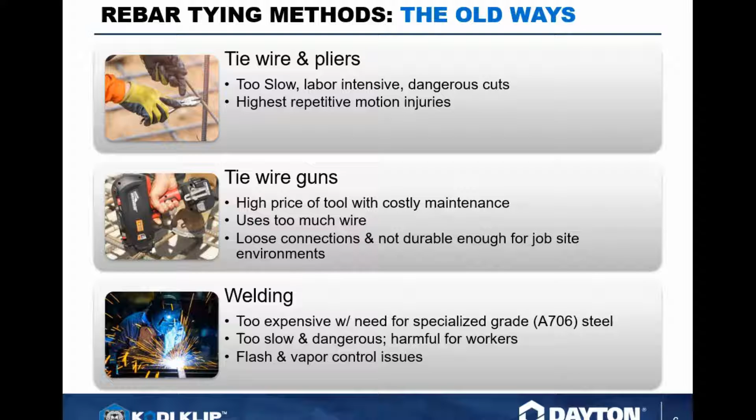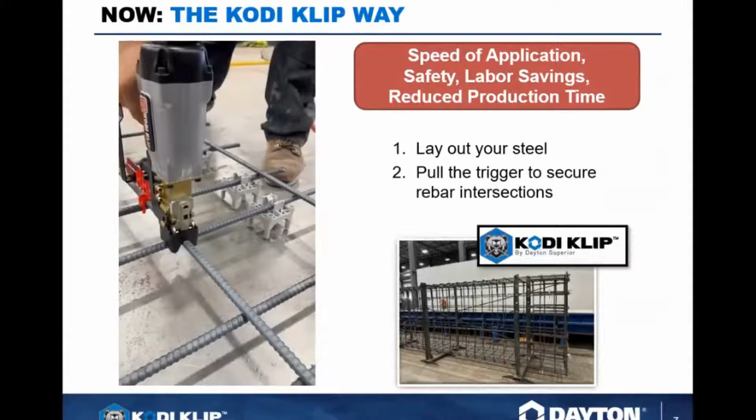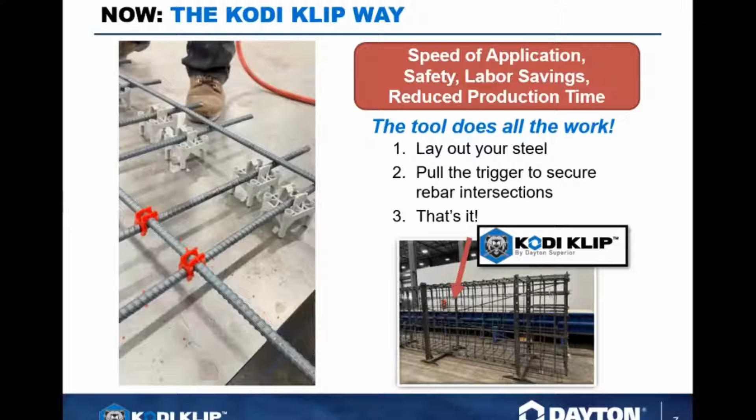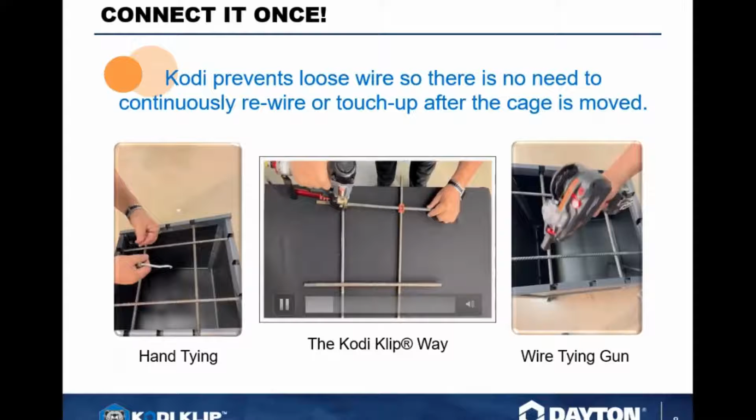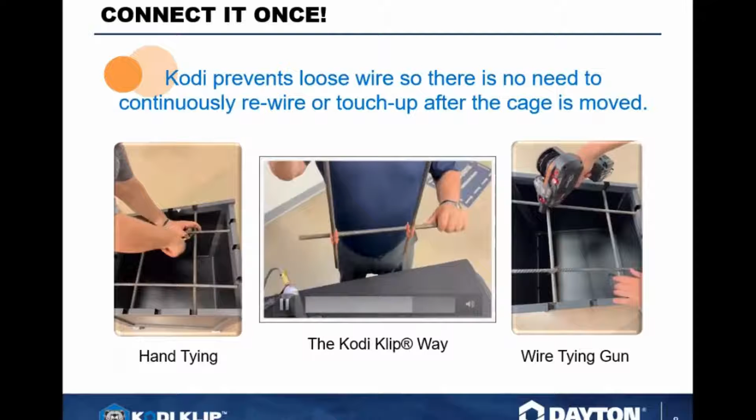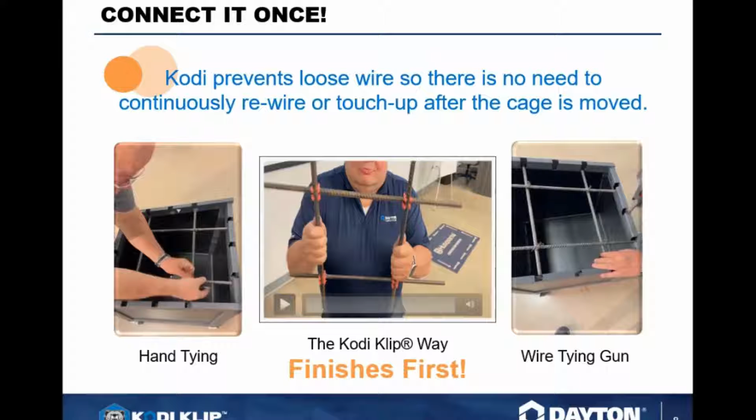Typically when you're looking at it here in the 3 videos, and granted I know I'm not the fastest guy with the whirly bird on the side one, but typically with the rebar cage, when you grab a hold of it, I like the rigidity of the cage itself. And it finished the fastest option, and it gave you the most rigid cage within it.

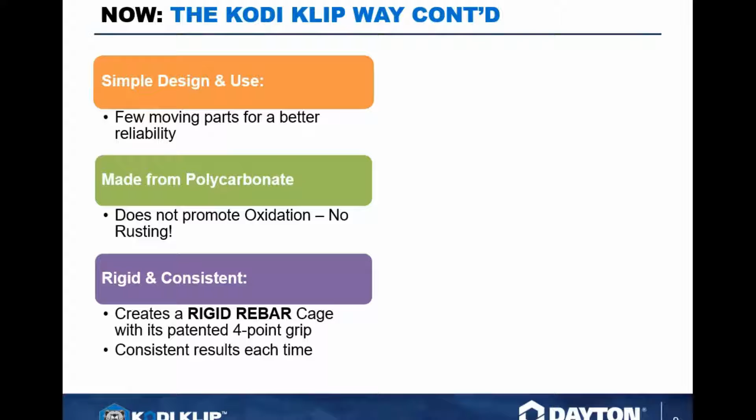Cost savings. No more retying, so if you're picking up, let's say you're doing small cages and having to relocate them in the fab shop, they can typically be picked up and carried out to where you need it without worry about the cages dropping or taking on a different shape, etc.

So this Kodi Klip connection can also be a one-man job. The rebar can actually be flat on the floor, and you can actually make a connection to that rebar. You do not have to have it elevated.

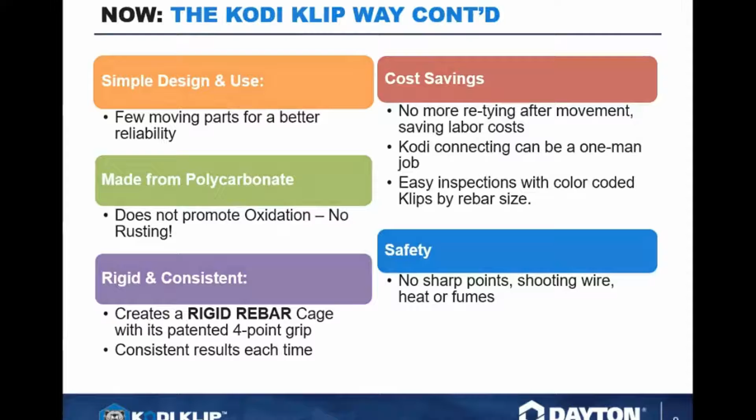Basically no sharp points, so we don't have any extra wire hanging out. The connections are smooth and easy. No heat, no fumes from any of the, especially the welding process.

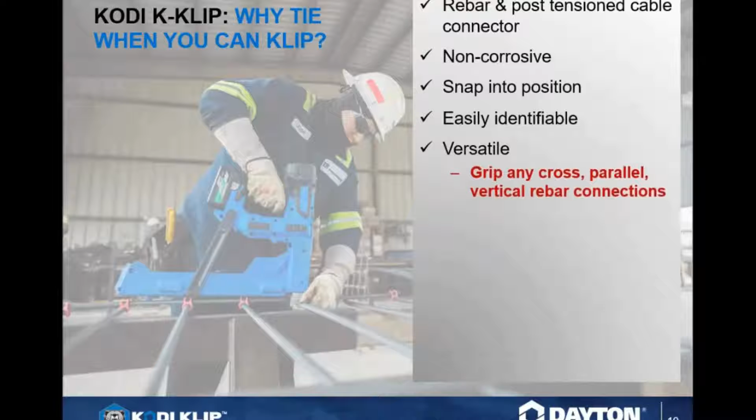So what can we tie? Well, let's start. We can do rebar, post-tension cable. We are non-corrosive, snaps into position easily, identifiable by using the color-coded chart that we'll show you in a minute. And it's extremely versatile. Grip any cross-section or parallel rebar to make a connection. Because you can not only use this gun to make an intersectional connection, but you can also do it like a lap connection with this bar.

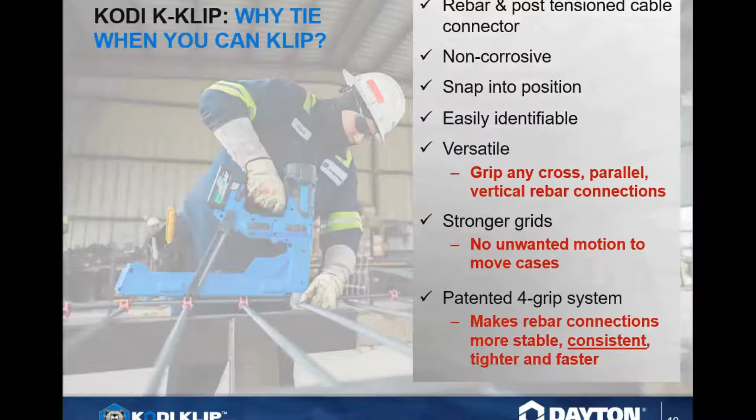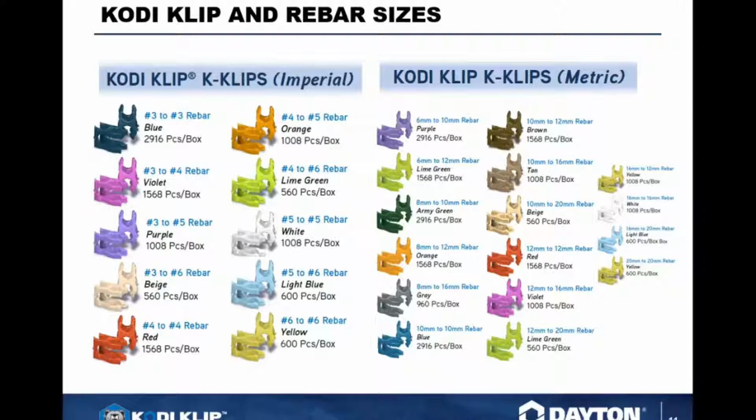It's a 4-grip system, which basically attaches the rebar on the left and right and top and bottom, so all 4 sides are actually connected. As I mentioned, color-coded clips make life a hell of a lot easier when you know the color code, when you know what size rebar you've got. You just grab the clip that you need, and the clip comes in a 15 and 20 piece magazine that slides into your gun. You can't get much simpler than this, and we're going to see the connections going through here now.

Now the clip guns, it basically takes about a second to actually make the connection with the gun. We've got the 4 pneumatics that we started out with. Oh, what's that on the bottom now? I'm sorry, am I going too soon?

The guns typically range in size 3 to 6, so you got a 3 gun, a 4 gun, a 5 gun, and a 6 gun. Those are all pneumatic. Great opportunity, nice light operation. Big drawback with that is the hose. Well, we eliminated the hose. We now have a brand new battery powered gun right now for handling 4 and 5 rebar, so you got 1 gun, 2 bar sizes.

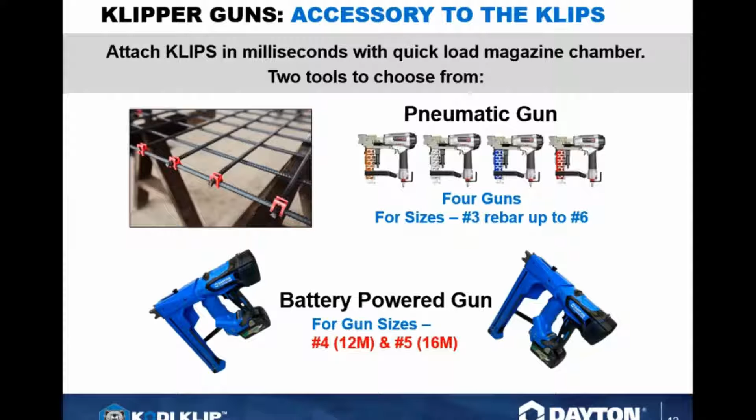There it is, the gun right there. It works off of an 18-volt Metabo platform. No hoses or compressors needed. Single gun - basically just a flip of the switch will actually change it from a 4 to a 5 bar. Obviously you've got to change the clip, but just a single gun makes that capable.

You're gonna see how fast and easy this gun is. Now the nice thing on this thing is we do have a spring loaded rail on here, so that you can actually attach clips and always have clips ready to slide in, so you can have a continual feed.

You also have a 90-day warranty on this gun for workmanship and materials. The battery information is an 18-volt lithium, 3-amp battery that comes with the system, along with a charger.

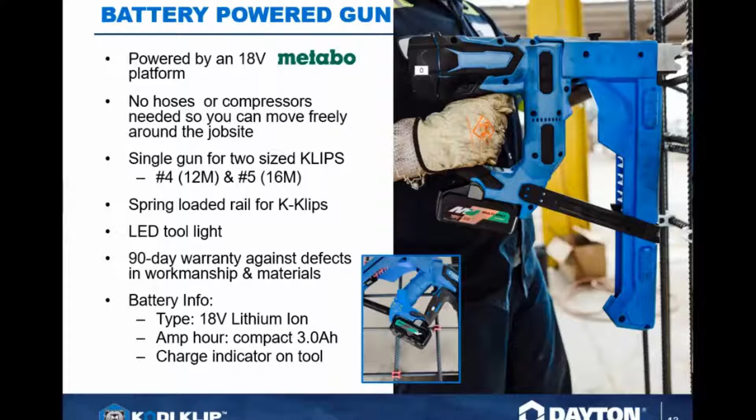Now, we can use it, as we talked, for post-tension cable. But the great thing about this gun is you can use the same clip, same gun with black bar, epoxy bar, stainless bar, galvanized bar, and composite bar. Composite bar is huge because every job I've seen right now, I've seen everything from guys trying to use stainless steel tie wire, which basically is also not technically allowed when you're using fiberglass rebar, or they will use a zip tie to make the connection.

So it's interesting, just to interrupt you real quick - we actually had a question right before you went to the slide of, can this work on rebar, plain epoxies? So yes, it can. And JR, if you were not answering your question, keep on typing and I'll let Chuck know. So you can use this with the post-tension cable.

The bridge deck, what can be used in bridge deck, road work, slabs on grade. You'll see it on light commercial jobs, basically wherever you're going to see any specialized bar, maybe a galvanized, maybe a composite rebar, where we're seeing more and more of that coming around in the business. We're seeing like pool patios and that sort of thing, where they don't want to have any metal or steel, period, in their deck. So they are going to a composite type material.

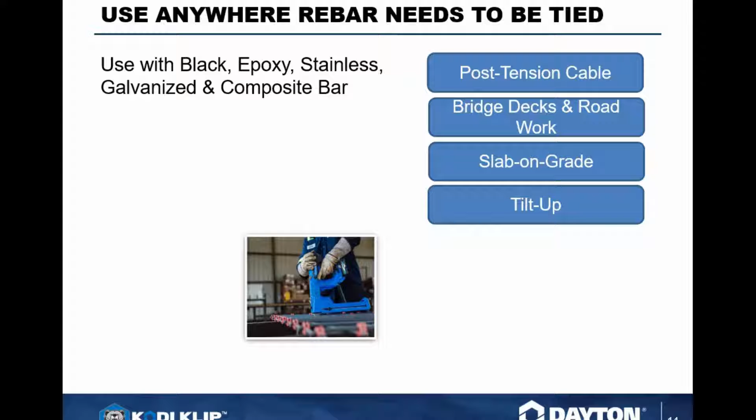And we're seeing slab on grade for that, obviously, and tilt up has been a huge market for that. The composite rebar, like I said, I think this is the niche market for this product here. It works extremely well with composite rebar. For any of the structural walls you've got going in place here, you can do this for tying walls and any precast or pre-stressed positions.

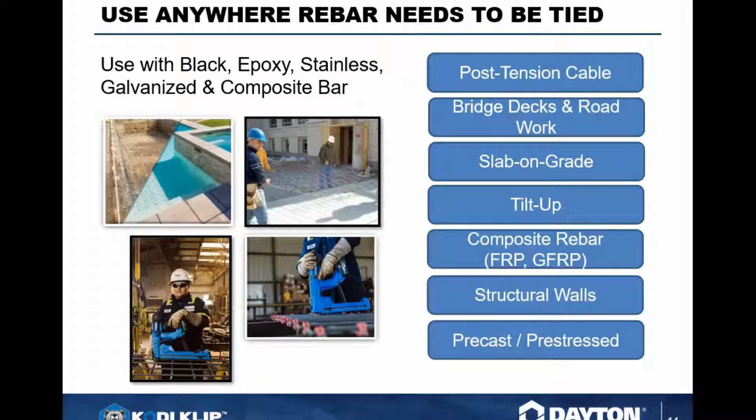The applications: you can do mesh to rebar, you can do GFRP, radiant heating tubes, manhole lids, vault lids - basically anything that would be typically precast and then assembled in the yard before they pour concrete.

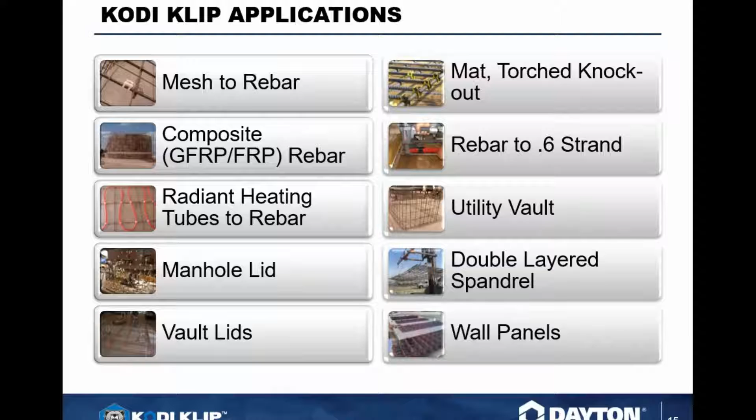So basically you can attach it to anything. A 0.6 strand can be used, which is basically about a number 5/8 inch strand. You are looking at also utility vaults and double layered spandrels, and then wall panels can be used for it.

Plant cages - these are cages that are typically assembled in a precast shop and then actually set into the forms and then poured concrete in and around it. You see the guys, they can grab a hold of this with a hoist, pick it up with a couple of hooks on the cage, pick it up, carry it where they need it, drop it into place, and pour their concrete.

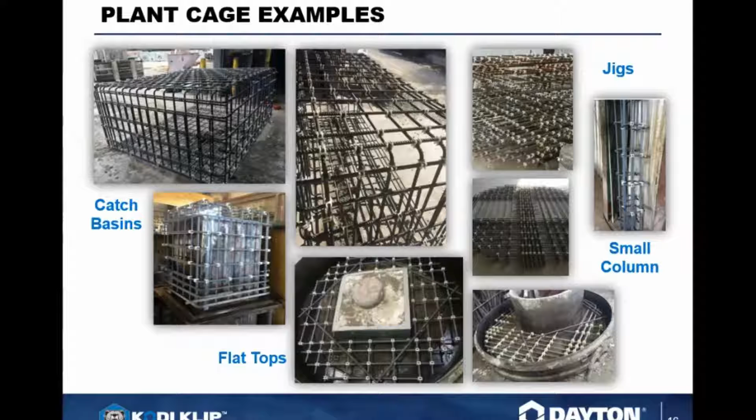Now the new battery gun. Like I said, we've been out now with this gun here. We showed the new gun here at the World of Concrete this year.

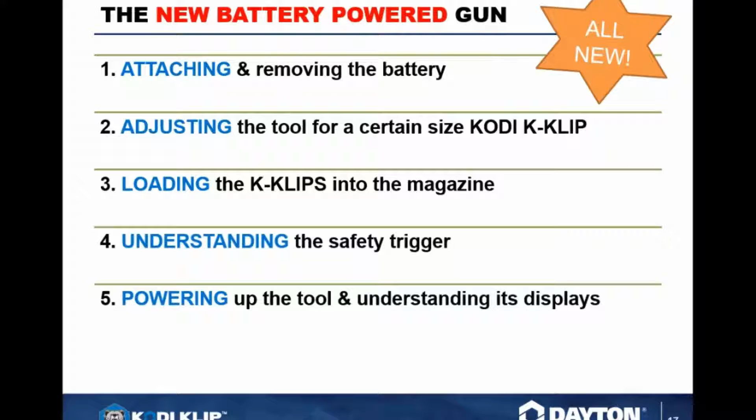It's attaching and removing the battery. We're going to show you all the processes going down through it - how to attach and run the battery through it, adjusting the tool for certain size KODI K-KLIPs, loading the clips into the magazine, understanding the safety trigger, and also powering up the tool to understand its displays. Then obviously how to use the tool.

So with this, we're going to start in, we're going to just slide the battery into place here. Typical connection - 18-volt Metabo just slides right in. Here, slides on, you're ready to go. Removing, same way you normally would.

So now, how to choose the clip size you're going to use? Well, that's depending on what size rebar you're going to use. Here, the orange is a 4-to-4, so we're going to use a 4-bar longitudinally, 4-bar transversely. So this would be the clip bar I would use. If you had a number 5 and 5, it would be a white color clip. So all the clips are actually color coded.

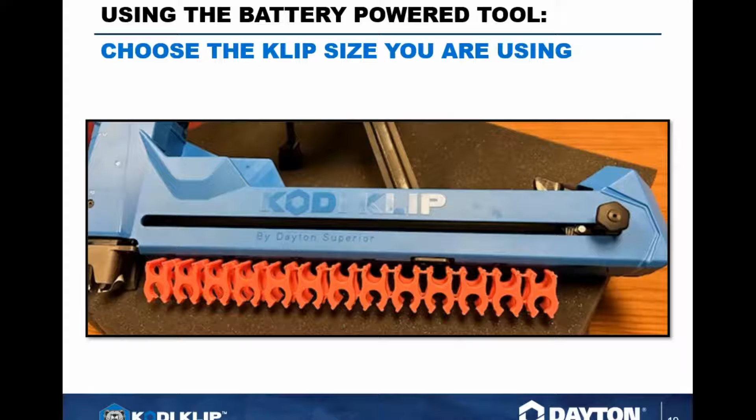And loading this gun, you're typically going to - how do you select the proper size?

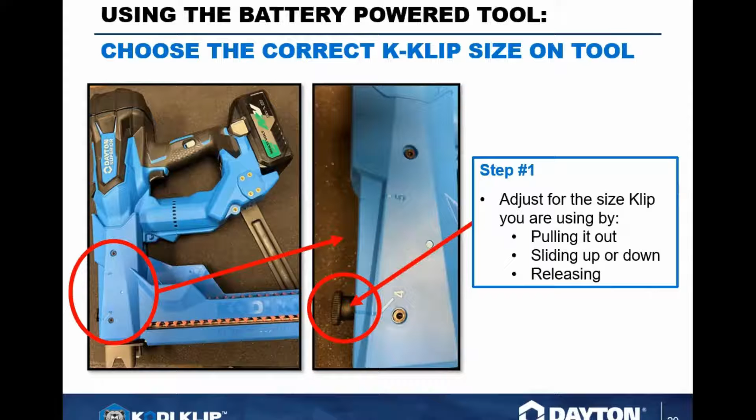On the end of the gun, as you can see, it is marked with a 4 and a 5. Believe me, people, we're not rocket scientists here, so we're going to just show you how easy this is to actually change from a 4 to a 5. As you can see, you've got the 4 here, the gun is set in the 4 dimension. We're going to take it over here to show you how to change it.

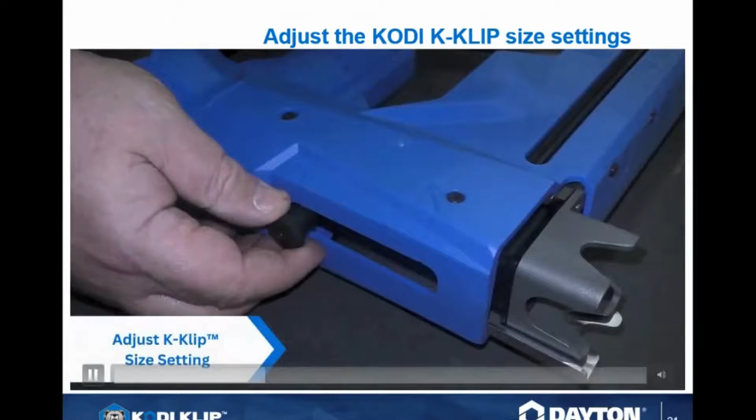Basically, you pull it out, slide it down, push it back in. I don't know if I could do that. That's a tough one, Heidi. I mean, I put my hard hat on to do that. Yeah, but it's that simple, that quick, that easy.

You now have changed from a 4 clip to a 5 clip, or 5 clip to a 4 clip, depending which way you're running with it.

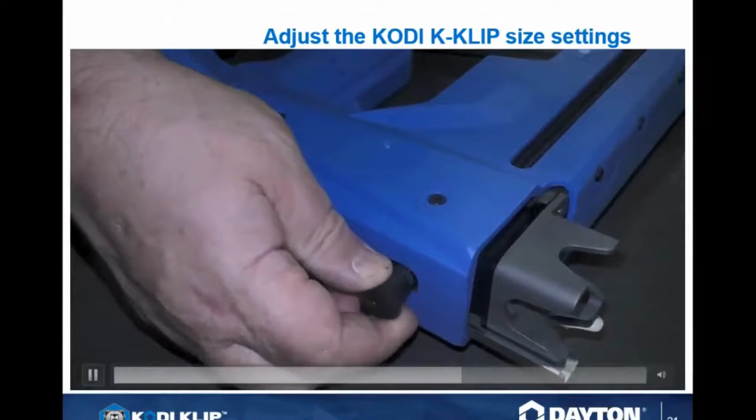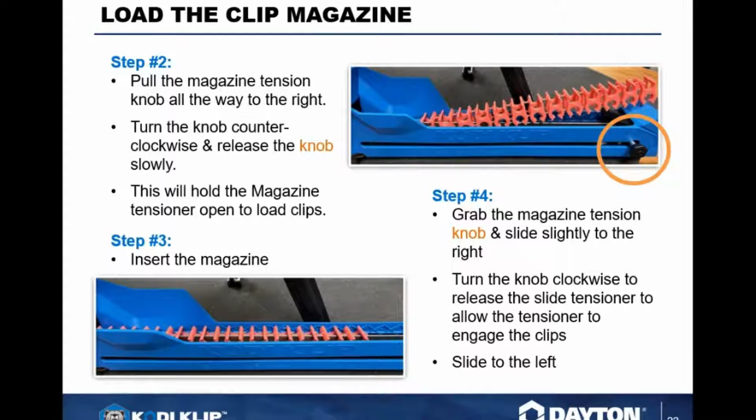Loading the magazine into the clip, into the gun, is relatively quick and easy. The easiest way to do it is to slide the clip in. I've already pulled back the tensioner, and then slide it forward.

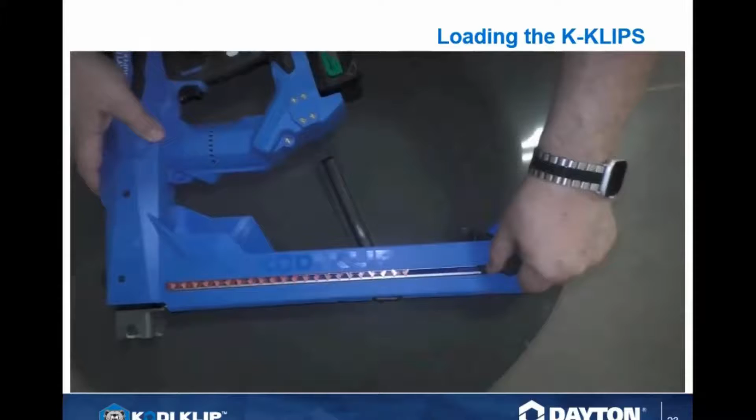Now, I've found out one little thing since we filmed this section: if you take the magazine clip and slide it to the back and engage it into that spring connecting piece at the end, it'll slide forward on you, already connected. So there's a couple of different ways to do it. Either way is quick and easy, doesn't take a whole lot of effort.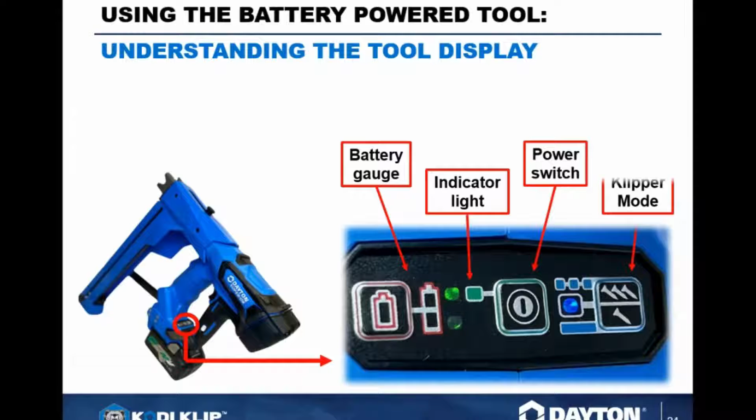The tools on this, the actual display on the tool. Now this gun was set up when Metabo first designed this gun for us. They ended up using a roofing nail platform.

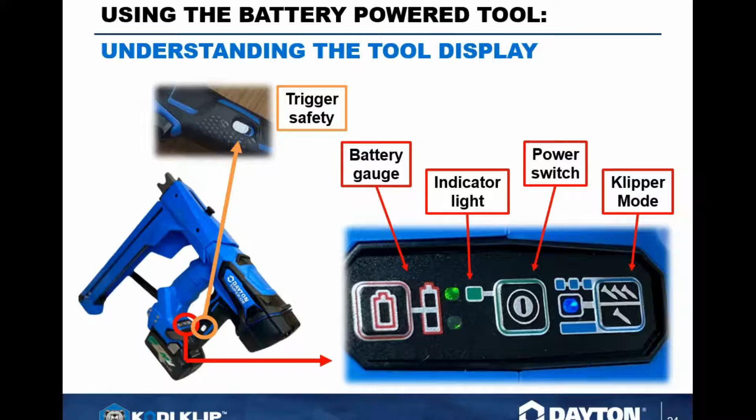So this gun here, we basically have the trigger safety on here. We have a battery gauge, which is very handy when you want to look at where your battery sits. You also have one on the battery itself. You also have an indicator light, whether the system is on or off, and then your power switch right next to it, and the Klipper mode right next to it. So we're going to show you how to operate this gun moving forward with these key components here.

First thing you want to do is push the power button on, so you get the green light to come on. That's going to come into place here. Basically, you push it 1 or 2 seconds, then the green button comes on. Then you push the Klipper mode button, which is the one on the far right-hand side. When you first turn the gun on, it is in basically automatic mode.

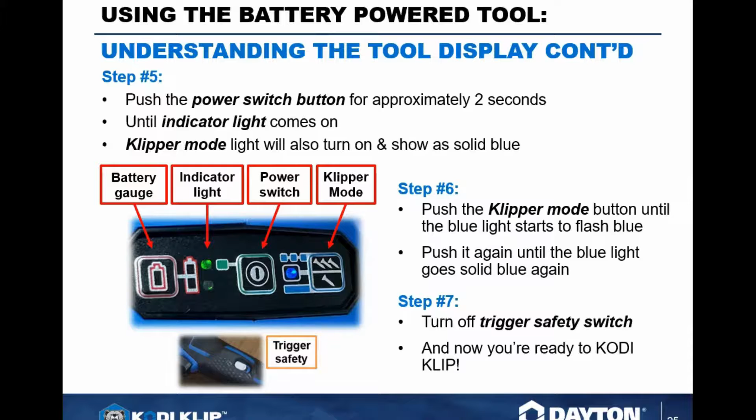If you can go like every 1.5 seconds of pushing down on the clip, the gun will fire. Since most of us aren't that quick with this gun, you're better off going to single mode, where you put it in place and pull the trigger. That would require you to take that Klipper mode and basically push the button a couple of different times.

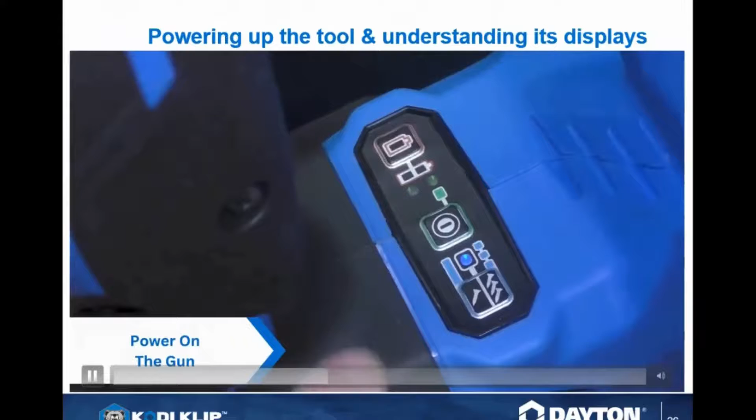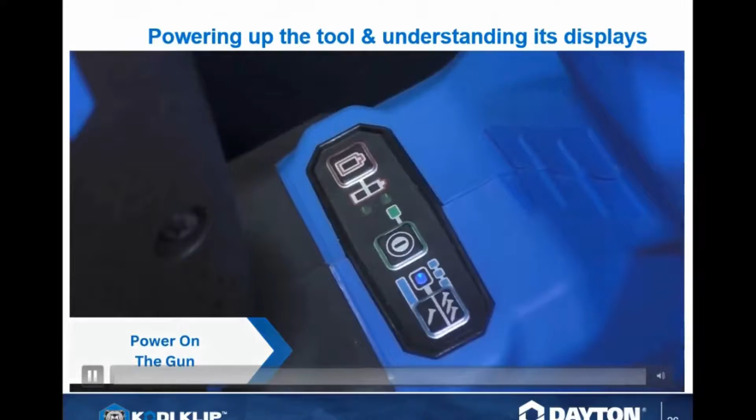Here we start to switch up. You can see that blue light is on there. We hit it, so now it flashes - now it's gone to multi-mode. Now we go back to single, where it's solid. So now we are ready to actually start engaging the gun.

Now we have a trigger lock on the system so you don't get any misfires. There's also a safety connection at the head of the gun, so that you have to have the gun engaged in rebar before it will actually fire.

You just see how that just locks it out. So it's a safety feature put in place here so you don't have anybody running crazy with it.

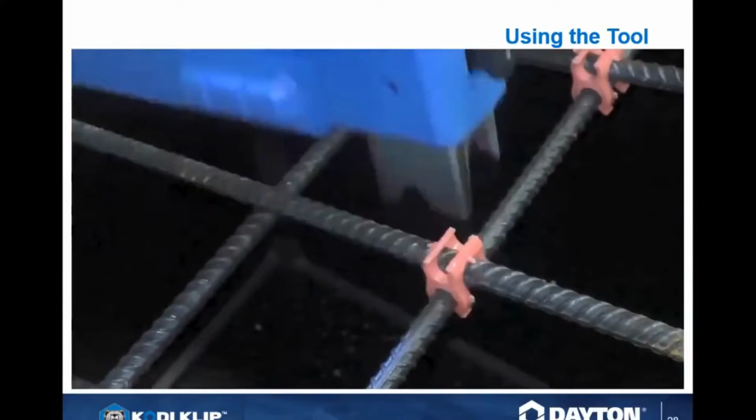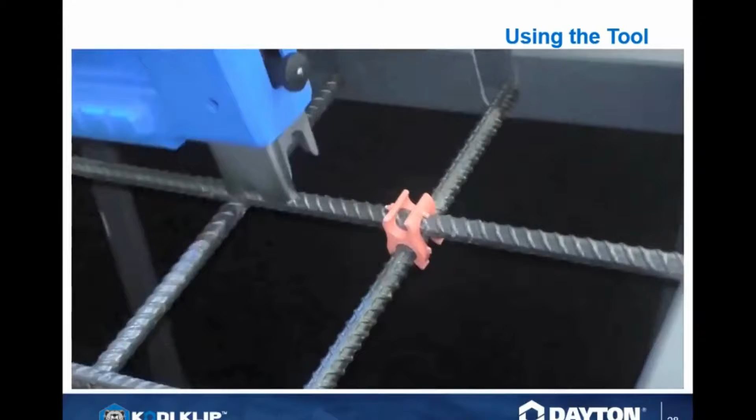Basically, at that point, what you're going to do is engage the gun. You can see how it sets over the top, and you just pull the trigger. You notice that the rebar wasn't touching - the transverse bar wasn't touching the longitudinal bar. So you force it down and push it into place, make that connection, and then the connection is completed.

Yeah, and we have a bag that you can put on you too that will have your clips, so that if you run out from that magazine, you can load it real quick like Chuck just said, and have at it.

Great, now we've actually made life a whole lot easier for you. We've set up resources available to you at www.kodiklip.com. This site is connected to the Dayton Superior site but is dedicated just for the Kodi Klip, so you'll have landing pages and product pages on the clips, the guns, etc.

You're going to have all the flyers available on the gun. The quick reference chart is also available. You're also going to have the manual, and the battery Klipper tool instruction safety manual is included here.